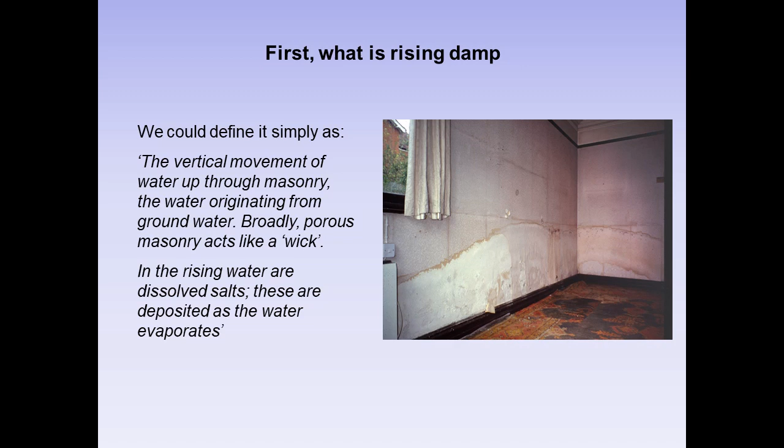Well, first of all, what is rising damp? It could be defined simply as the vertical movement of water up through masonry, the water originating from groundwater. Broadly, porous masonry acts like a wick. In the rising water are dissolved salts. These are deposited as the water evaporates.

So, rising damp is a myth. So what's the definition of a myth? Well, any fictitious story or unscientific account or belief, or person or thing whose existence is fictional or unproven.

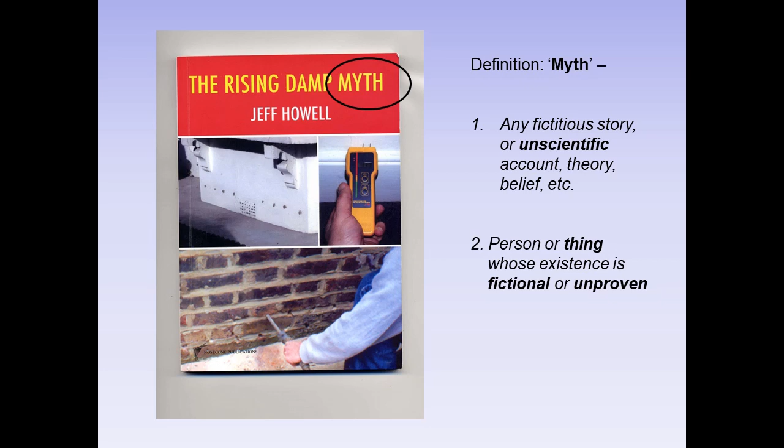So if we look at the rising damp myth, it states, 'For the fact is that rising damp is a mythical building defect, which only came to widespread prominence in the 1960s.' It continues by saying, 'The rising damp myth has become so powerful and so deeply ingrained in the psyche of the construction professions that to question it is to invite denial and even ridicule.'

The author of The Rising Damp Myth and other individuals say that rising damp must be, therefore, by definition, unscientific account or a belief, and fictional or unproven. Ergo, it doesn't exist. Let's have a look at some past quotes in relation to this.

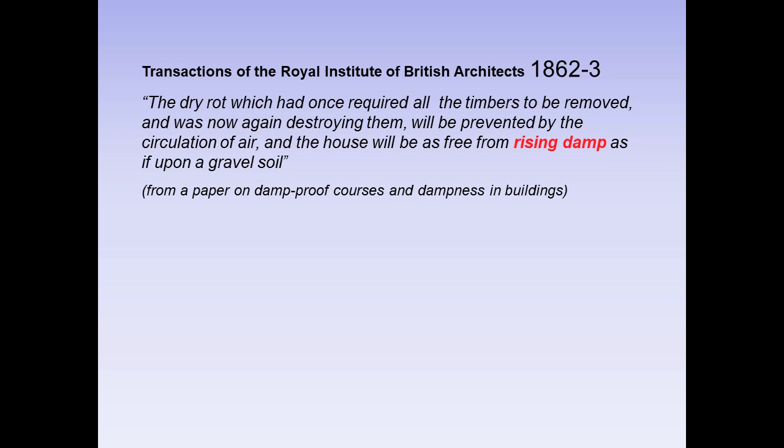Helps to Health by Sir Henry Burdett, 1884-5, rising damp is mentioned. A treatise on hygiene and public health in 1898, rising damp is mentioned.

Building News and Architectural Review, 1862: note the ill effects of damp rising up the walls by capillary attraction, in other words, rising damp.

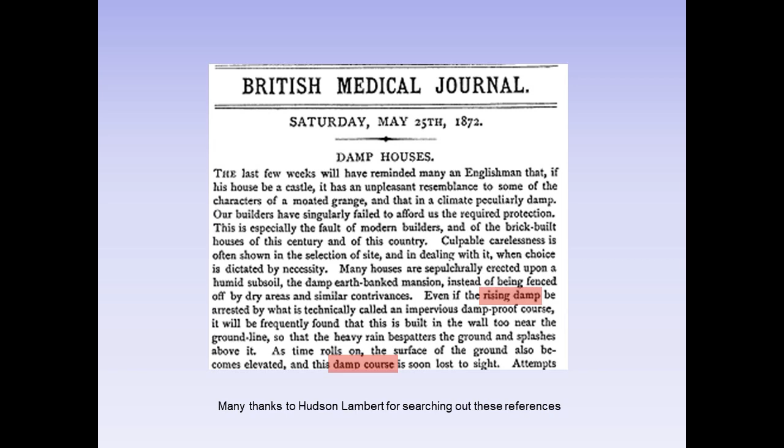And we come to the author's own practical research into rising damp. When he was at South Bank University, he carried out some sponsored research in the laboratory during the mid-1990s to simulate rising damp. This involved building brick pillars and setting them in water.

It was published in several newspapers, but what did the Architect's Journal write about this work in 2009, following the publication of The Rising Damp Myth a year earlier in 2008? Well, this is what they wrote.

Jeff Howell, a qualified bricklayer and author of The Rising Damp Myth, said trials in the laboratory confirm the falsehood of rising damp. 'If you build a brick pillar and stand it in a tray of water, the bricks in the water will get wet, but the water doesn't rise by capillary action,' he said. 'Cement-based and most lime-based mortars will not allow water to go through.'

Remember, this was sponsored work. However, a letter from the author to one of the sponsors in 1994 stated: 'In the foreground there are two pillars of Ibstock red Leicester facing bricks, which are nicely wet up to 5 courses and starting to show a pattern of efflorescence at the evaporative surface.'

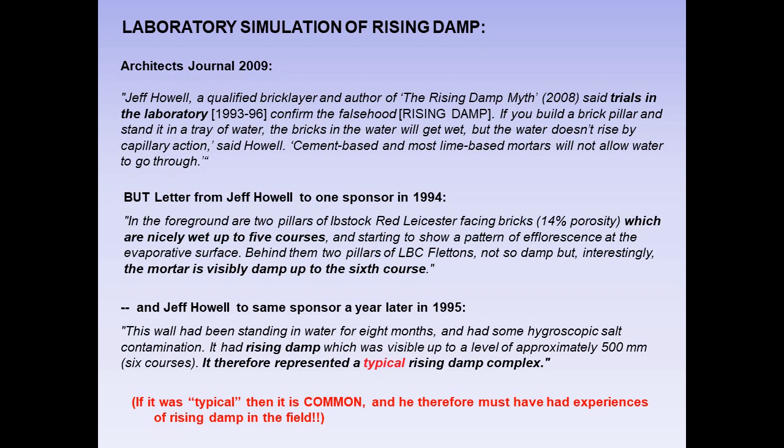Well, quite simply, if it was typical, then it is common, and he therefore must have had experiences of rising damp in the field.

So how does his research at a university support his rising damp myth when he wrote the following? And we've just covered that. Well, it could be argued it's distinctly disingenuous and stupid.

So let's have a closer look at rising damp. How can we define it as a starters? Well, we could define it as the vertical movement of water up through the masonry, the water originating from groundwater. The water rises through a series of interconnecting pores by a process called capillarity. Broadly, porous masonry acts like a wick.

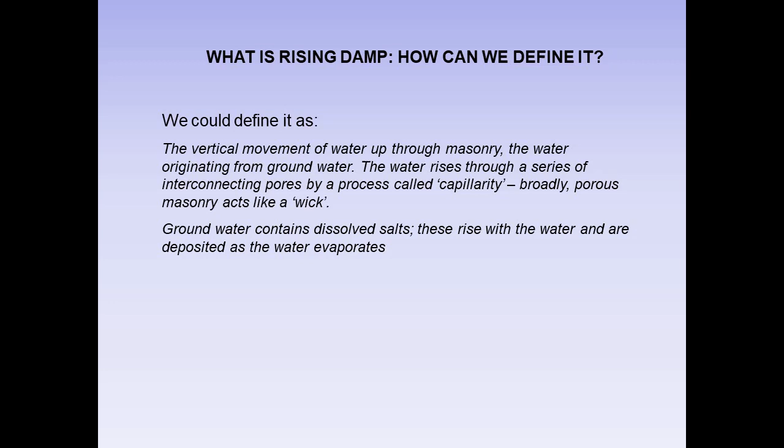If we look at a wall, in the lower parts, if there's rising damp, we'd expect to find water and groundwater salts, e.g. chloride and nitrate, the most common, whereas above a certain height we wouldn't expect to find any water or groundwater salts. Thus, the presence and distribution of the salts in relation to the presence and distribution of moisture are the keys to the diagnosis of rising damp. It is therefore essential to determine both.

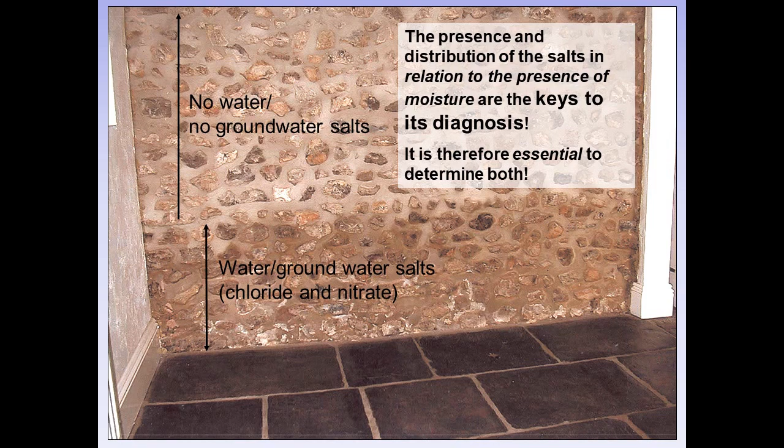The most common method of evaluating moisture in building materials such as mortar is given in Building Research Establishment Digest 245, aptly named Rising Damp in Walls, Diagnosis and Treatment. The method described in the digest is designed to determine the following.

If we take a material, the total moisture content of that material is potentially the sum of two components. The first is known as the air-dry or hygroscopic moisture content, moisture in a material when it's in equilibrium with the air, what we regard as a dry material, where there's no water ingress. It's a material's standing level of moisture, and it varies with the surrounding humidity. The second component, if it is there, is known as the capillary or free moisture content, moisture that fills the capillaries of a material. It is only present where there is an active source of water ingress. It is this water that usually causes the problem.

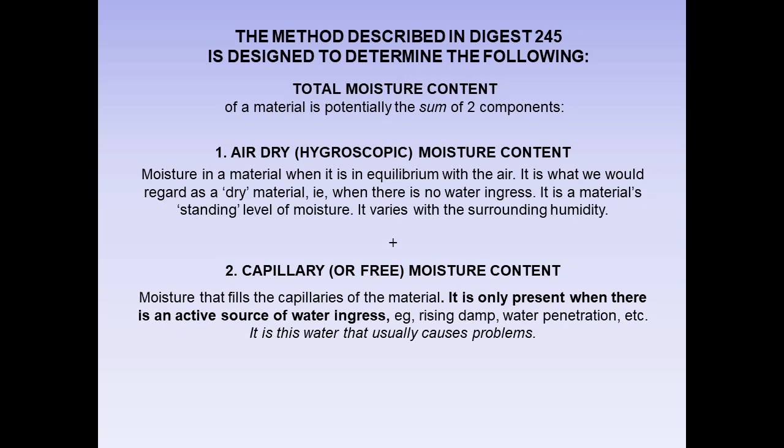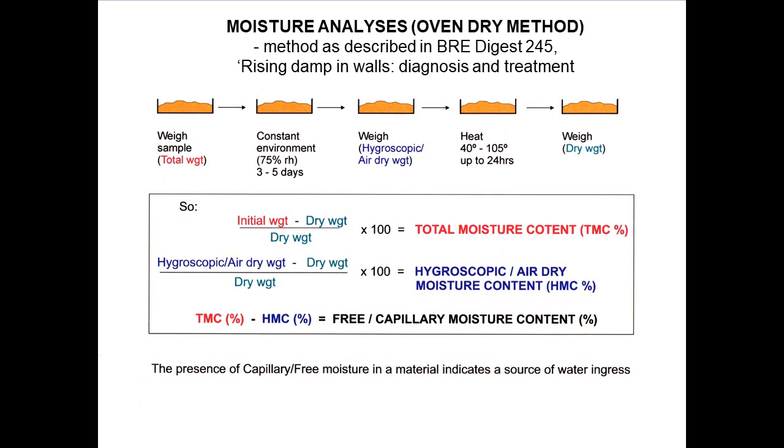That's the analytical method as described in the Building Research Establishment Digest 245. Note at the very bottom it says the presence of capillary or free moisture in a material indicates a source of water ingress.

The principle behind the method is very simple. If the sample, once removed, loses weight, it has dried out - in other words, it lost water. Thus it contained free moisture, and was subject to a source of water ingress at the time of its removal. If the sample does not change in weight after removal, indeed it may gain, it was dry, not subject to water ingress at the time of its removal. It is important to note that the method identifies the presence of water ingress if it is occurring. It does not necessarily on its own identify specifically rising damp, and certainly not from a single sample.

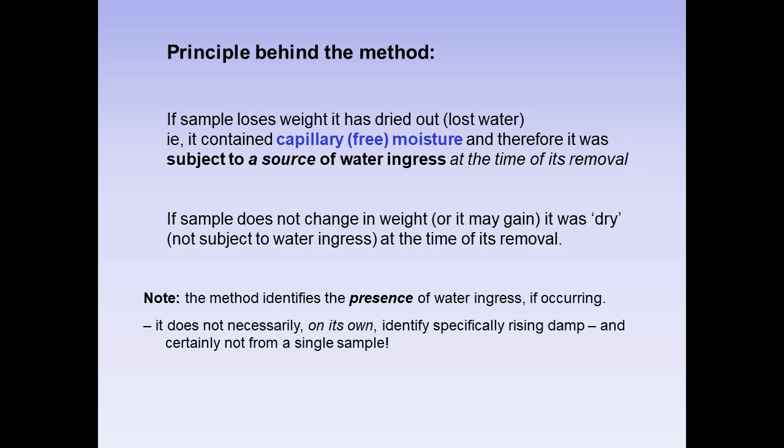The author explains the method in the rising damp myth, but he has completely misunderstood how the results are interpreted. He states, if the sample gains weight, then it was contaminated with salts and therefore possibly affected by groundwater. This is odd really, because could the groundwater be from the mythical rising damp? If it loses weight, he states its moisture content was more likely due to a non-salt contaminated moisture source such as rainwater or condensation.

If we look at this, it's quite evident that the author's interpretations are nonsense and wrong. The correct explanation is as follows, and it is explained in the digest. If the sample loses weight, it simply shows it was subject to water ingress from some source. If the sample gains weight, then it was dry, no water ingress, and removed from a relative humidity lower than that of the test conditions. It does not necessarily reflect salt contamination.

Based on Mr. Howell's explanation, one could never find rising damp, and may well explain why he has never found it, or so he claims. He clearly doesn't appear to understand the published method and interpretation of results.

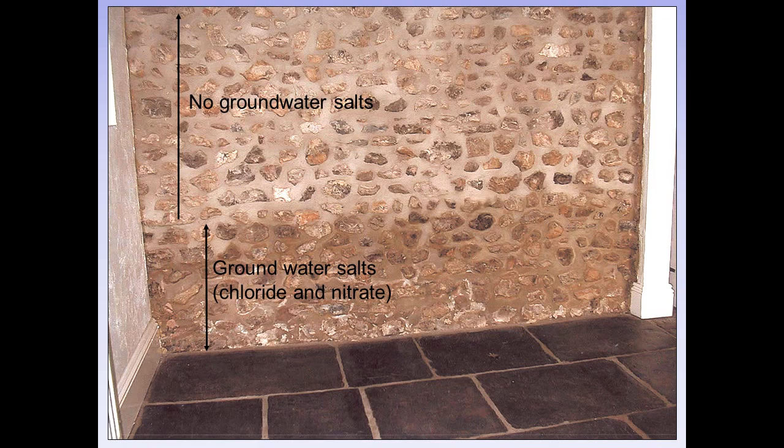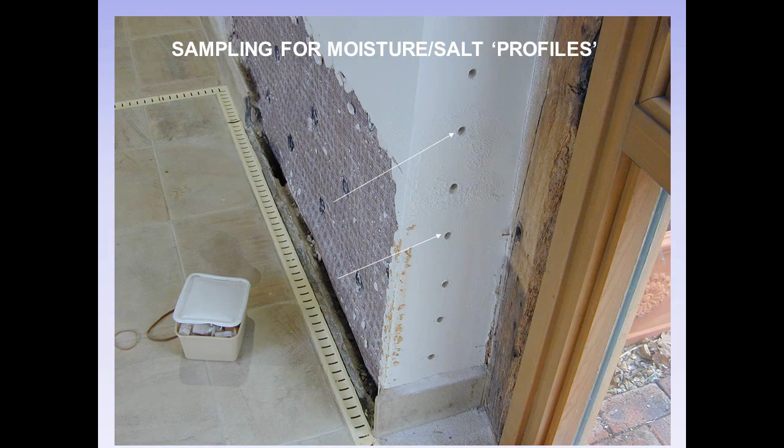Going back again to our diagram of rising damp, it is the presence and distribution of salts in relation to the presence of moisture that are the keys to its diagnosis. If we want to look at rising damp, we really need to look at moisture and salt profiles, a vertical series of samples in which we can carry out our analyses of moisture and salts.

Case study, a profile. There we go. What we're interested in is the capillary moisture content, the free moisture, water that shouldn't be there. In this case, we can see it is present up to a height of 1200 millimeters. We've got a lot of water at the base that shouldn't be there, and it declines going up the wall, which indicates it's coming from the base.

However, also note we have salt contamination up to the same height. Above that height, there are no significant levels of salts. This is an indication, one, the wall has got rising damp, two, it is still fully active, because the salts always mark the maximum height to which water has risen. In this case, the salts are rising to 1200 millimeters, as is the water.

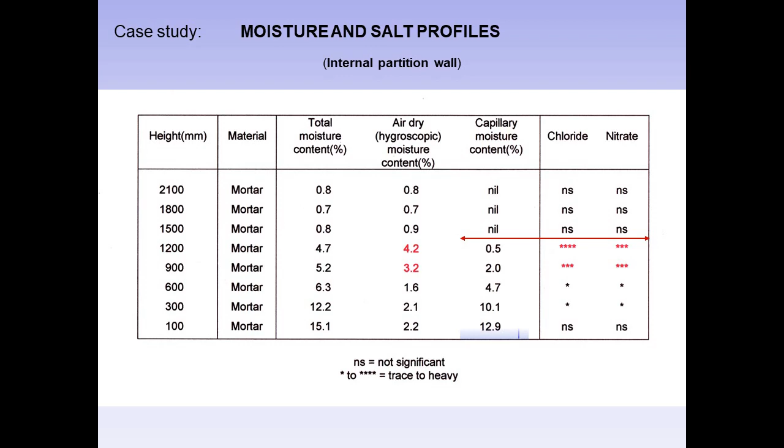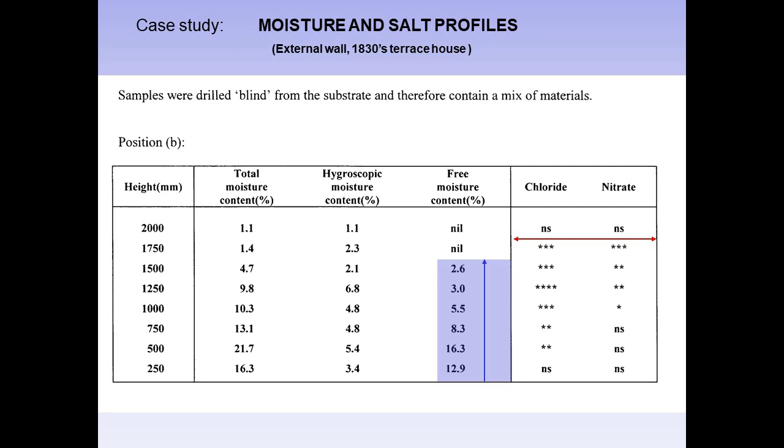So what does this tell us? Well, we know from the position of the salts that the moisture once rose to, it was groundwater because that's where the salts have come from, to 1750 millimetres, but now it's only rising to 1500 millimetres. Therefore, there has been a small dryback.

Finally, a 16th century building, 500 years old. Again, doing the same exercise, a moisture and salt profile, moisture profiling as described in Building Research Establishment Digest 245. In this case, we got a little bit of water ingress, up to 250 millimetres.

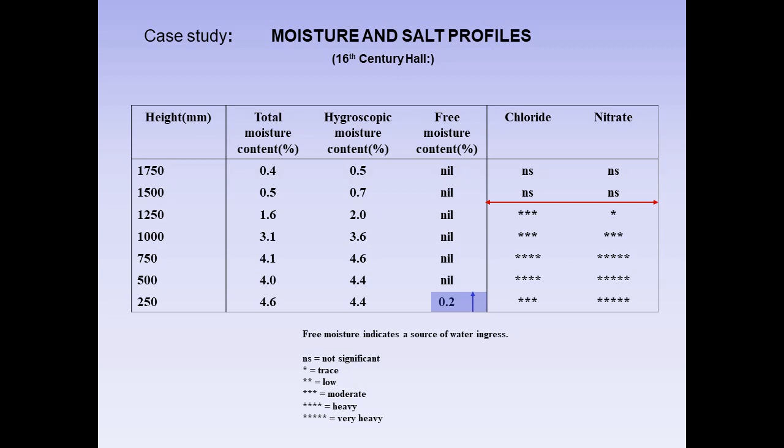However, note that the salts are present, and hell of a lot. After all, it's had rising damp based on this for a long time. They're present up to 1250 millimetres. So we know at one time the salts, or rather the water, rose to 1250 millimetres as identified by the presence of salts, but now it's only rising to 250 millimetres. It's dried back a lot.

So that was an example of rising damp and the methodology. Well, let's have a look to see how the myth has been manipulated.

Well, let's go back. Is this ridiculous or just a good story? It comes from the rising damp myth, from the author who stated: I had told him, Sharpe, more about Bob Sharpe in a minute, that I had been unable to find a single case of genuine rising damp. His reply was short and to the point. Well, he said, neither could we.

The author in the book continues to tell us that Bob Sharpe was BRE's top expert on dampness in buildings. He was the author of many papers, reports and digests on the subject, including the landmark BRE Digest 245, which presented the definitive official view of the diagnosis of rising damp. To hear him say that he never found a genuine case of rising damp in the British House was astonishing. And it was still odd to hear from the top expert that the whole subject of rising damp, and by definition, the entire workings of the British damp-proofing industry, were based on a myth.

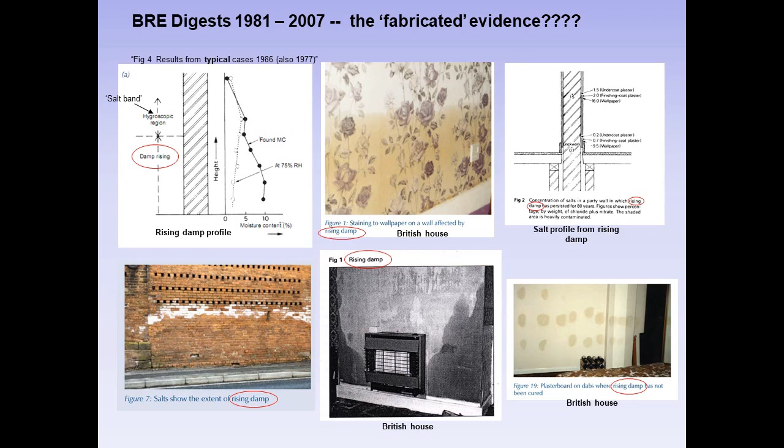More fabricated evidence. Another publication. Works by Harrison and Trotman. They're both in BRE. They examined a large number of properties in the Cardiff Bay area and sampled in accordance with a method described in BRE Digest 245. And in their report, they stated rising damp occurred in 76% of party walls, or 54% of internal freestanding walls.

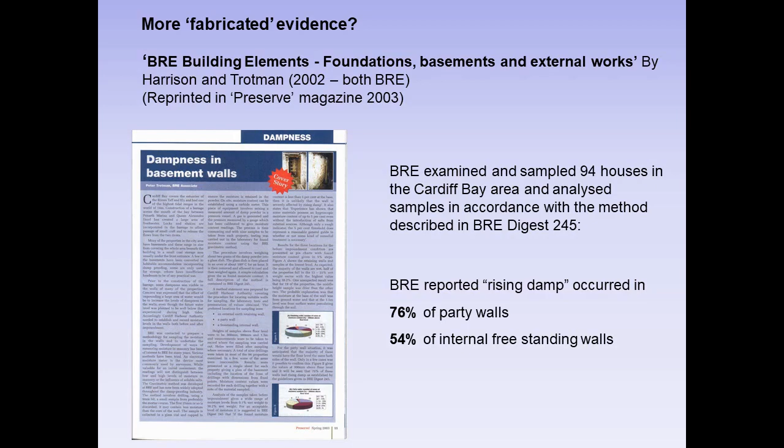I'll just recap a bit here. Mr. Howell in his book states that Bob Sharpe was BRE's top expert, etc., including the landmark BRE Digest 245, which presented the definitive official view of the diagnosis of rising damp. So, top person. Again from the book, Bob Sharpe in 1978 found that pressure injection of the damp-proofing fluid into his test pillars was completely ineffective in producing a damp-proof course.

It was clear that no damp-proof course had been established in either brick or mortar at any stage, and Sharpe found this had not been enough to produce an effective damp-proof course.

However, if you actually read the paper, the abstract at the beginning and the conclusions, Sharpe concluded a test wall was constructed using a particular grading of washed sand, in which a substantial moisture gradient was created. When this wall was injected, an effective damp-proof course was formed. This could well form the basis of a realistic performance test of damp-proofing treatments.

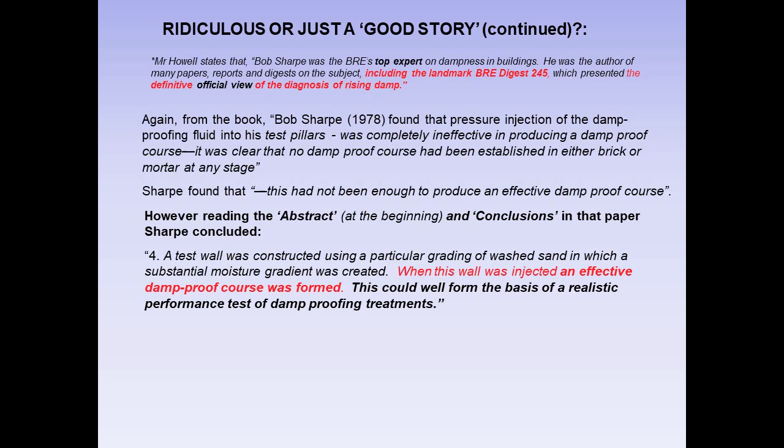So why do we have the difference quoted from the same paper? Well, the author of the Rising Damp Myth chose to quote from the mid part of the paper where the test was being developed, not the final evaluation and conclusions. I think you've got to agree that this is distinctly false, unethical, and deliberately, grossly misleading.

We now come to British Standard 6576 of 2005, also first produced in 1985. So what's it called? Code of Practice for Diagnosis of Rising Damp in Walls of Buildings and Installation of Chemical Damp-Proof Courses.

In the Rising Damp Myth, the author quotes the following: Bob Sharpe told me that there were two main reasons why BRE was under pressure - I doubt that - to produce rising damp in the laboratory. The other reason was to contribute to the writing of British Standard 6576. The British Standard Committee for this purpose included, funnily enough, representatives from major damp-proofing companies who had themselves been unable to reproduce rising damp under laboratory conditions.

Fact: BRE did develop a laboratory test for rising damp, as we've just mentioned earlier. Bob Sharpe developed it and published this in 1978, as indeed other countries developed methodology. A similar method to that Sharpe developed is used by the UK's British Board of Agrement for testing, and several suppliers of damp-proofing materials did reproduce rising damp under laboratory conditions, including one installer.

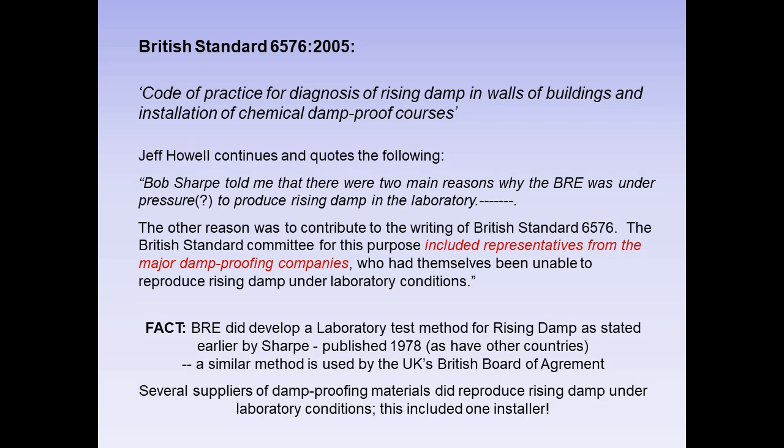It also begs the question, if we look at those groups, why would a group of such eminent and knowledgeable organisations, including BRE, RIBA, ABE, etc., experienced in the built environment and the materials, gather and conspire to fabricate a British standard in 1985 and 2005 about a matter that is, according to Mr. Howell and some of the others, a complete myth and doesn't exist?

We're also told in the rising damp myth that rising damp, it seems, was a peculiar British phenomenon.

However, Australia - Salt Attack and Rising Damp, a guide to salt damp in historic and older buildings - that is from the Heritage Council of New South Wales, South Australian Department for Environment and Heritage. There's some pictures there of rising damp and injection of damp-proof courses.

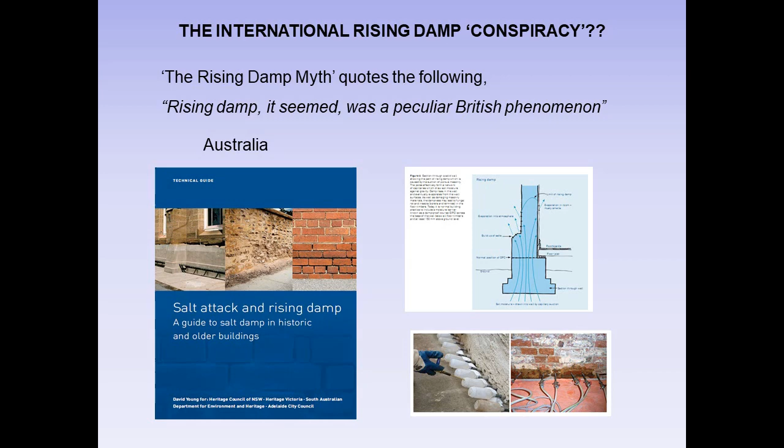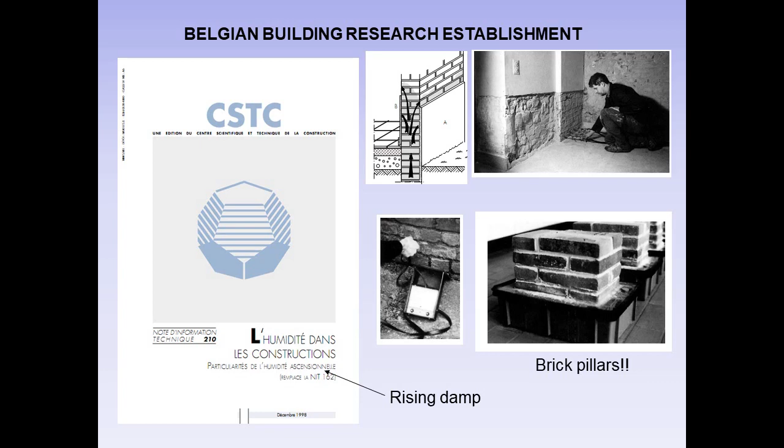Belgian Building Research Establishment - rising damp, when translated - look, they've built brick pillars, such as those mentioned by Howell and indeed Bob Sharpe earlier. That's what they're using for testing. Countries where rising damp has been studied, there's a whole list of them, even America.

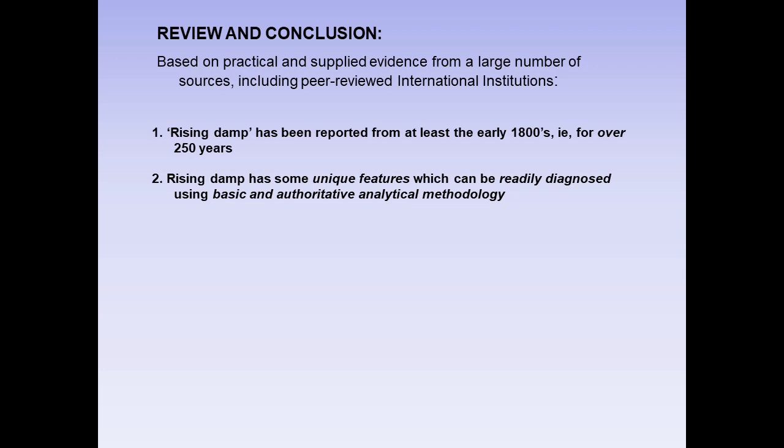Rising damp has some unique features which can be readily diagnosed using basic and authoritative analytical methodology. Rising damp is a well understood and identified feature which can occur in some buildings. It is a fact, not a myth, and was not originated or perpetuated by the UK damp-proofing industry.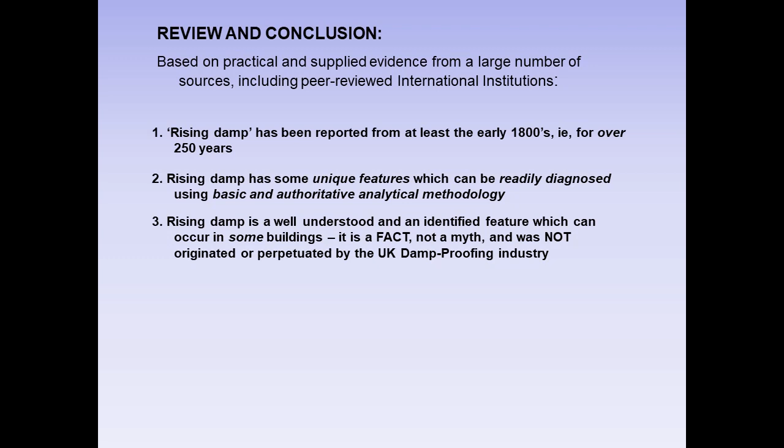Rising damp is well recorded in Belgium and the rest of Europe effectively, and in Australia and the United States, all of which have produced authoritative peer-reviewed publications on this subject. It is not solely a UK problem.

And the Rising Damp Myth by Jeff Howell? Well, the contents are diametrically opposite to many years of researched and published facts from national and international peer-reviewed institutes and publications. The reported conversations and situations with Building Research Establishment and Bob Sharp are simply unbelievable and not consistent with over 20 years of BRE's own research and published evidence.

The author contradicts himself on numerous occasions, even his own work back in the mid-1990s. And there is a failure to understand basic science, no rigour or objective evidence to support his claims.

And finally, one really must ask, why would eminent and knowledgeable organisations and major European and Australian laboratories and universities, all with experienced staff, work and publish on rising damp for many years, only to be told by a few individuals that it is a myth? Unlike the aforementioned establishment, the Rising Damp Myth book and others have never provided any evidence whatsoever to support their claim.